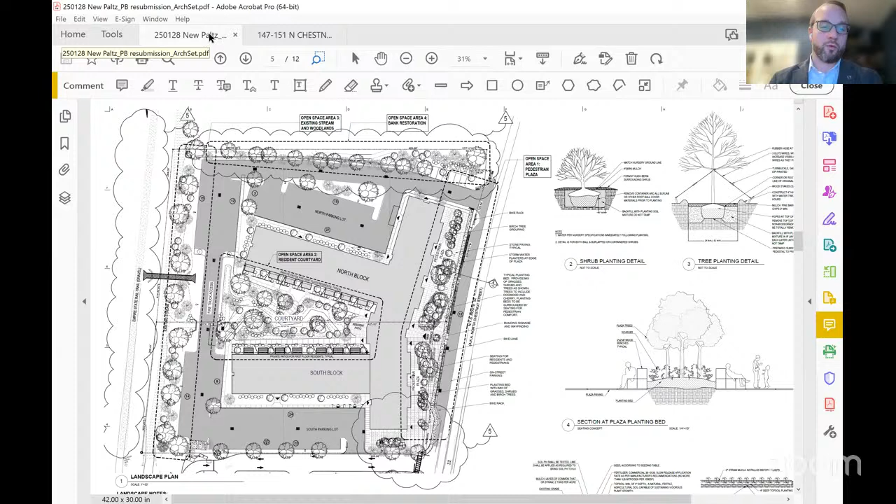If I may, the zoning board did weigh in on it during our initial meetings with them in July and leading through October of last year. They did make a request that we include it. Now, our variances have nothing to do with the trail, but they did make a request that we consider including this connection. So the zoning board at least made an affirmative ask that we include it. Similarly, even though it wasn't necessarily related to the relief itself, we made some other changes based on zoning board comments, for example, the proposal of the shared driveway with the development to the south. So we've been hearing comments from this board, your historic commission, design review board, and the zoning board, incorporating all those comments throughout this process.

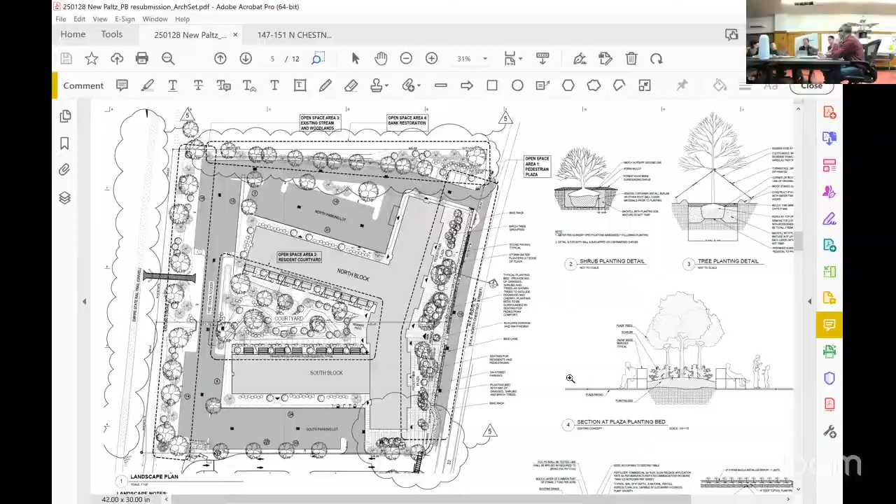Right. Well, I think moving on, we talked about traffic briefly. Mike, what was the latest update from our consultant?

So it's in your packet, the 2-page front and back from DTS is the last comment from them, and I believe you received that by email. Yes. And we have online tonight Brian Haggerty from DTS. At the last meeting, Mr. Chairman, which you weren't available for, the board had some specific questions and discussions about the impacts at the signalized intersections. That was sort of the gist of the discussion, so. I don't want to put words in people's mouths, but that's what I mostly remember. And I think you were gonna have some reaction to some of the questions.

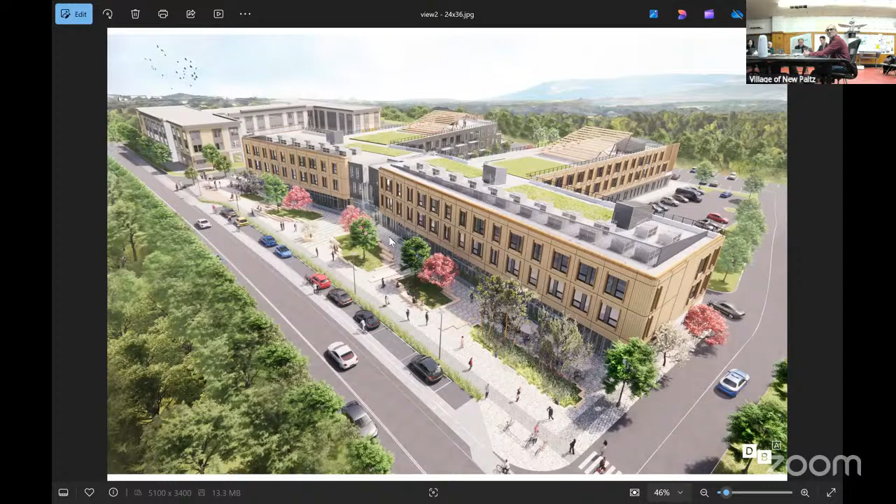Again, you've seen this rendering before, really not much change, just a slight elongation at the south side, and then the shared driveway running between the two buildings.

The request at the last meeting was for a view from the north looking south. So this is in fact a new rendering that you have not seen before, and this just highlights the pedestrian activity and the northern access road into the building. You can see at the end, the 145 package.

And then lastly, the rendering. Suspense is getting... I'll pull up the files. Second, it's here. Might have frozen. There we go.

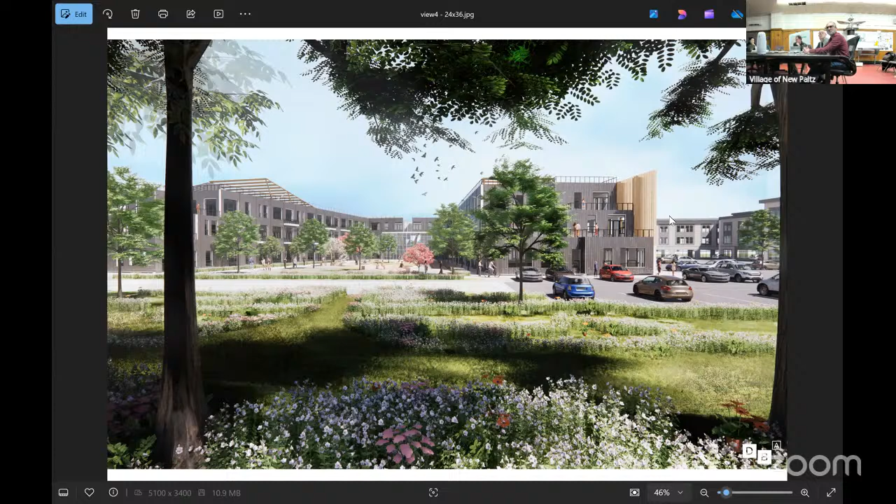And that is from the rail trail looking across the stream and to the rear yard. You'll notice the application of 145 also shown. And the residential courtyard, looking east into the shared amenity.

Okay, and is that actually the number of trees that will be between the rail trail and the project? It's very close. Yes, okay.

Well, thank you for bringing those, it's very helpful. I think going through these, the board's in agreement there's a moderate impact on question A.

For B, may result in the obstruction, elimination, or significant screening of one or more officially designated scenic views. I do not believe that is the case. I don't.

The proposed action will be visible from publicly accessible vantage points. Around, I think, yeah. There would be some moderate impact based on that.

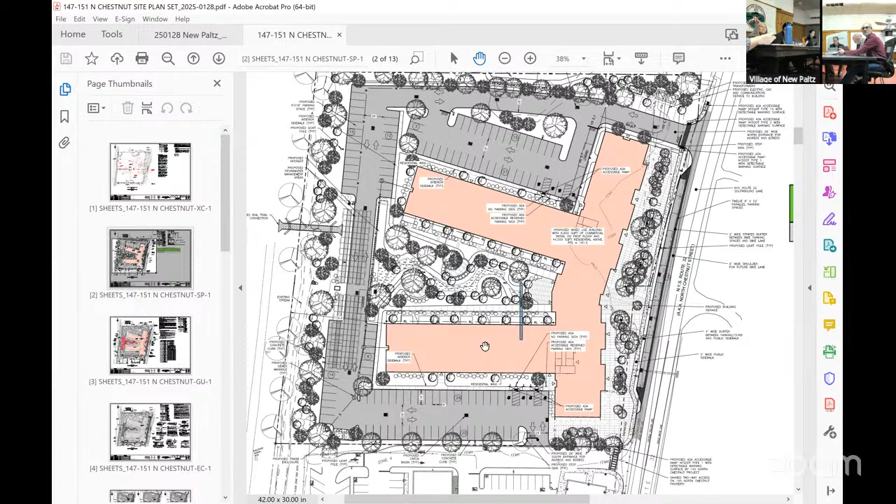Well, I think then that leads us into question D, since the rail trail is more recreational and tourism, I would say one and two are applicable. Routine travel will be from the roadway, I suppose.

Considering the existing condition is a vacant lot and a single family home, I would suggest that both would be moderate, but could be answerable in part 3. Yeah, okay.

Proposed action may cause a diminution of public enjoyment and appreciation of the designated aesthetic resource. I mean, I would lean towards small impact. Yeah, yeah, so.

I never know how that question still works out. Does that mean there's more or less of an impact if there are others? It's less impact. I don't think it has much of an impact, because basically they're doing exactly what we wanted them to do in this area.

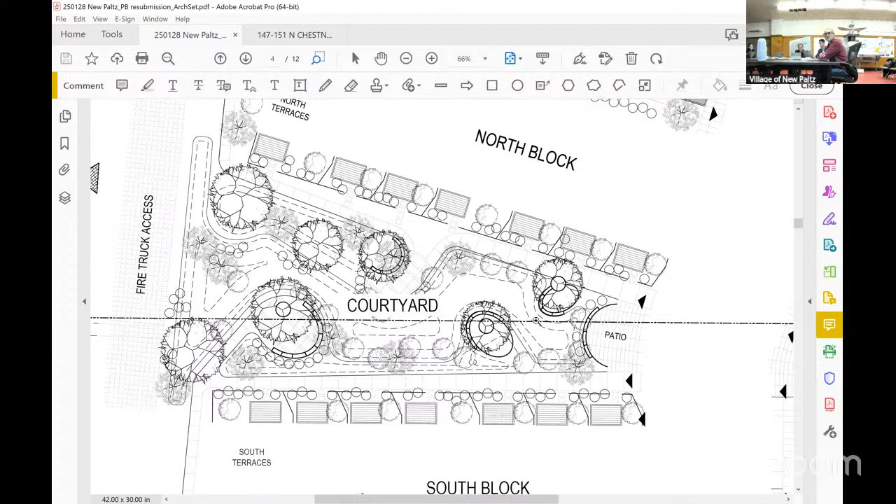It's a green courtyard, and it's also meant to give the residents a place to be outdoors. So between the trees, it's not paved. No, it's not. It looked like in the specific picture it looked like cement. Pervious pavers is the phrase I've heard. The paved areas are for safety, to bring people in and out of the building. So for instance, on the perimeter, you have paved walkways that allow the residents to move from one side to the other. But inside, this perimeter paving is all a catchment area for water. It's effectively, sometimes with a lot of rain, could become almost a wet location. So it's very pervious, very green, with the exception of the areas that the pavers show circulation.

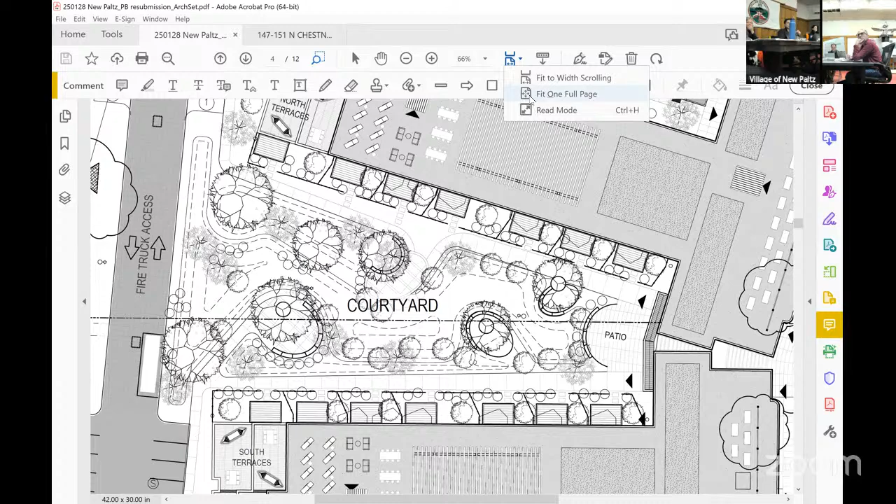There was something else I noticed on the rendering that I wanted to ask about. It seemed like the railing - when you're looking at the roof, there's that high railing. Was that something that the...

The design review board did comment on the railing, and they preferred it being smaller and set back. So at one point we did remove or reduce the height and move it back so that it's less impactful visually. That was really their main comment.

I mean, it's still pretty visible. Is that like a code regulation, that it has to be a certain height?

It does have to be a certain height, and in fact I feel like it does provide actually a cap, if you will, to the building. So aesthetically, I think it actually does complete the top edge of the building, like a traditional kind of cornice, but it's also providing a safety requirement to anybody who goes up on the roof for maintenance.

And what material is that made out of? It would be a steel rail, painted, most likely.

For the view from the rail trail, were we okay with that? Yeah, the only question I had was that it seems very open. I don't know, based on the site plan, it looks like there are actually more trees that will be between the rail trail and the parking lot, but I think you're right about that - so I would like to see a little more screening, but maybe this isn't representative of what's on the plan here.

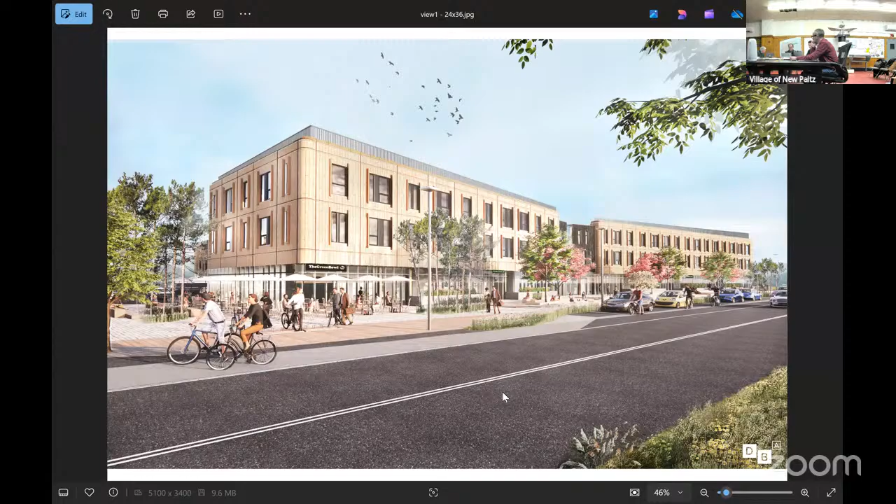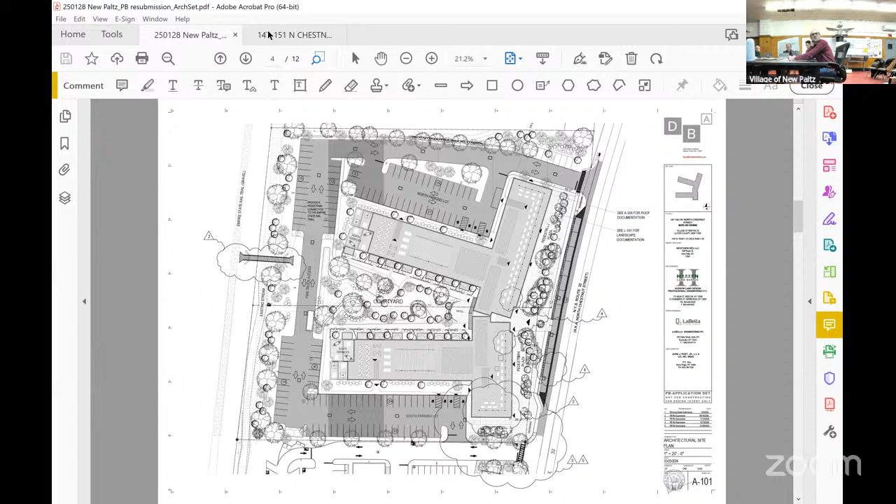Are you able to put up the image that showed, and maybe zoom in - there were a couple loading areas that looked to me like they're just sort of stopped in the flow of traffic, unloading at the curb. I'm not sure if that's loading areas for the businesses or what that is, but they sort of feel to me like they're in the traveled path. It's a personal preference of mine, but I'm not a big fan of that - I'd much prefer a separate loading area away from the travel lane.

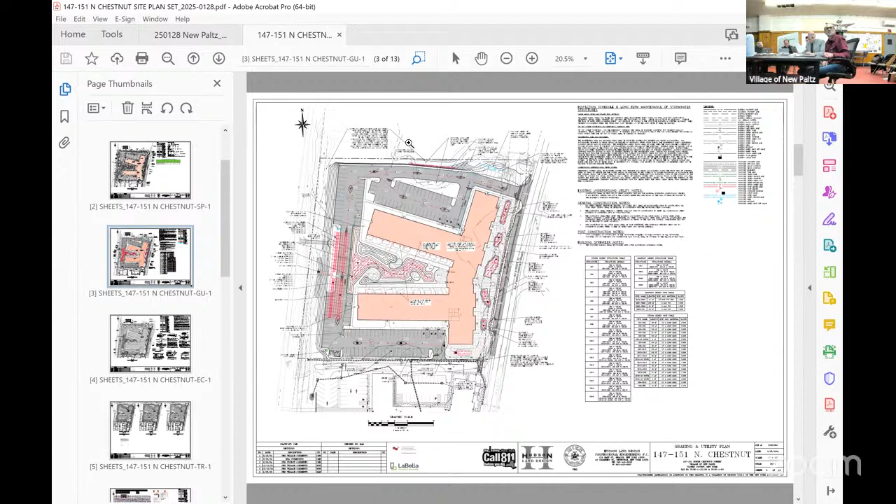Is the loading on your plans, Eric? The loading is on the - there's one in the back of the building, the northern part, and one on the back part that I saw for sure. So there were a couple - we have a vehicle turning plan, which I think they also highlighted. DTS also addressed this, but we can start with this, I believe. So these are the vehicle turning...

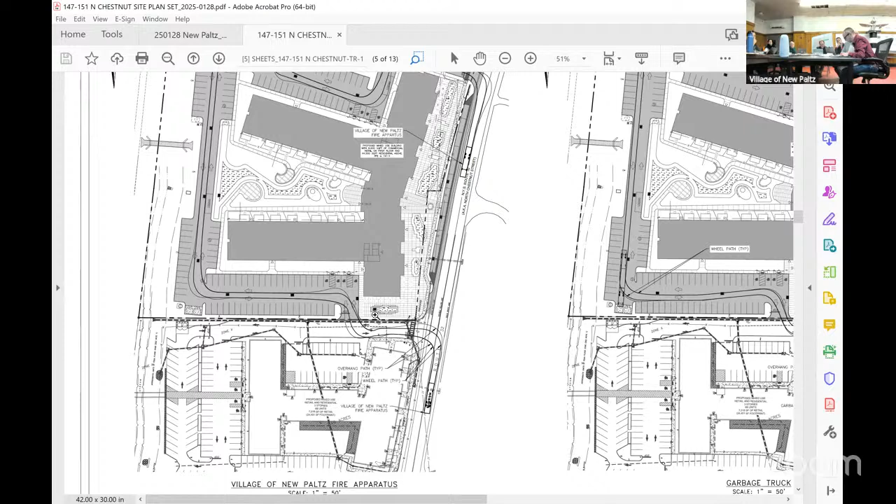Yep, and then if you zoom in - might have to get rid of that scroll bar on the left. There was a loading area for sure in the northern part. Yep, so I see, Eric - correct me if I'm wrong, it's the loading there, there we go. Yeah, and then right here, there's two.

Just for the board's convenience, DTS did note that the loading zones were identified on the site plan, and the turning templates demonstrate adequate maneuverability to these areas, as well as the dumpster area for a garbage truck.

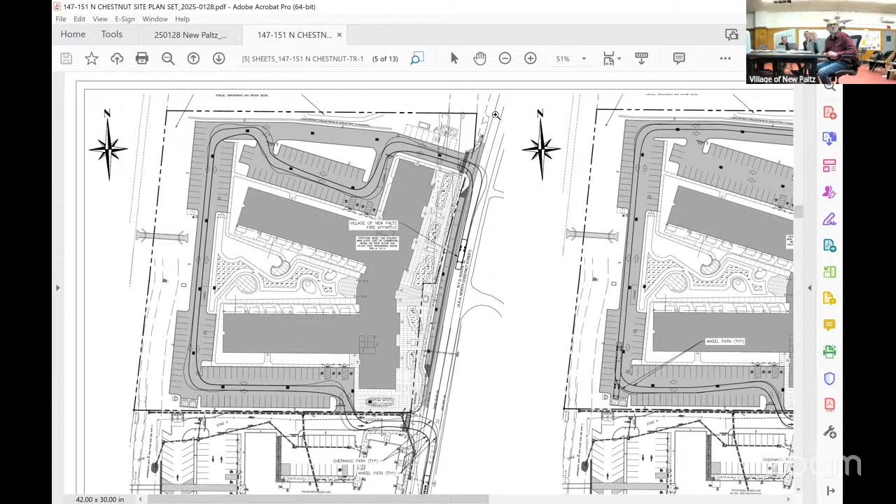I understand they don't block the turning radius, it's just, I wanted to bring it to the board. Maybe it's my personal preference, but making the loading area be in the path of travel. Can you zoom in on the upper part of that screen? Right there is the loading area.

And you'll see it's just part of the traveled way. That might also be because some different diagrams are used for the fire apparatus versus a garbage truck, so there might be different widths on that, but we'll clarify that as part of the information we provide. I just wanted to bring it to the board to have them look at that detail and see if you like or don't like it.

What you're seeing here is a fire truck's engineered turn. So this isn't the path that all traffic would take, it's the path a fire truck would take.

Sure, so that's a unique condition that wouldn't happen all the time. I mean, would two cars fit side by side next to that if there was a truck unloading? They could, but it would be tight.

I think in the past, as our site plan, we could stipulate certain loading times when peak activity is not happening. Or we could find a design solution.

As a plan then, if unloaded there, I see the sort of curb cut into the building. Would somebody be delivering on a dolly or a hand truck and coming into that? I'm just picturing with the large amount of commercial space that you potentially could be getting large deliveries.

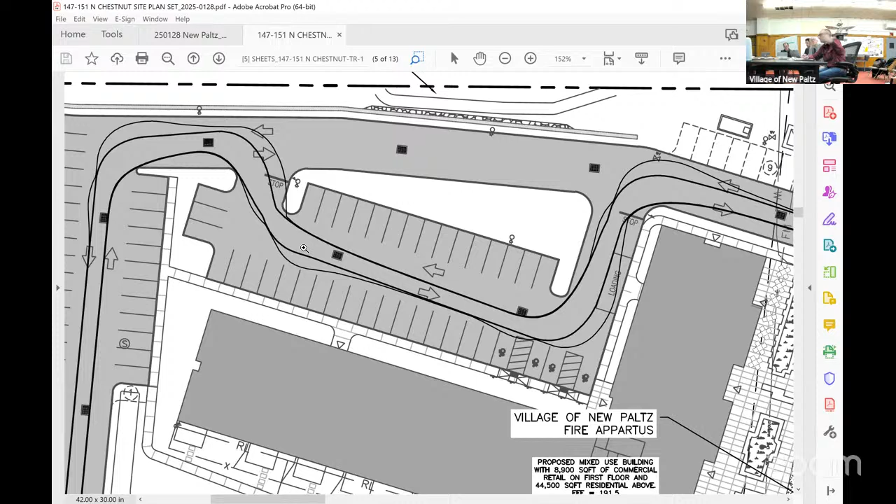There's also a second way out of that parking area, to the left, you can go out that way, so it's not blocked. And the other loading area was along the back side. I think I only saw two, I don't know if it was.

I mean, that one does appear to be in the traveled way based on the arrows. We definitely hear the comment; as part of the information provided, the board authorized the drafting of part 3, which will provide commentary on that, but I appreciate the comment.

Yeah, it's more about the site plan than the part. Yeah, I just wanted to mention it. People pull off, easy enough to do. It's not much of a problem, okay.

So for our next steps, would we consider setting a public hearing? Or do you think we're at that point? If you're ready, we can. We don't have to, we could open the public hearing and keep it open while we're going through one of the next steps too.

Yeah, if we want to do that. I do think we want to give adequate time for the public to hear about it and for things to come together. Would you want to consider setting the public hearing for the March meeting? Then there'll be one more meeting where they could potentially come back with answers for part 3. Set the public hearing for the March 4th meeting, which gives a little more time to get answers to part 3 and get that completed, just a suggestion.

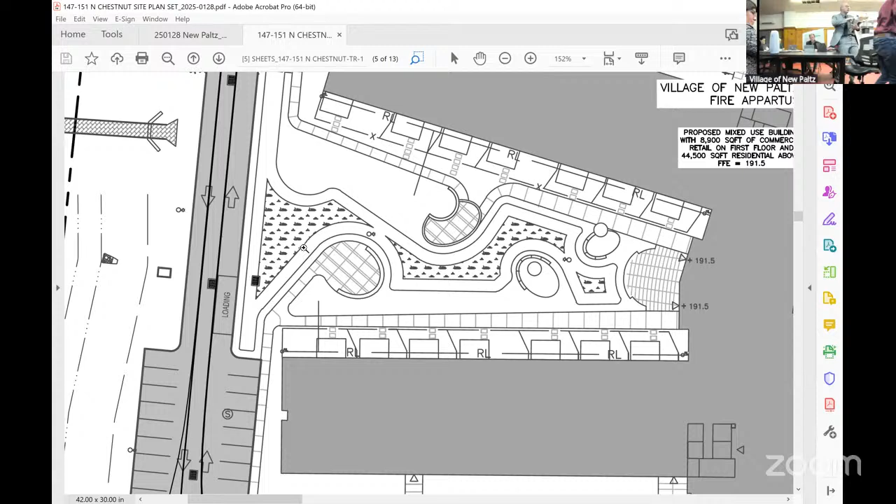There was an update today, very minor, to the proposed site plan. We'll have the latest. The changes were minor: the house shifted a few feet, and the pool shifted a few feet.

This is a project in the upper corner of the Green Acres neighborhood on Cooper Street. It's a double lot, currently flag lots, and the owners want to combine them into one lot and build a house. So we're before you for subdivision or re-subdivision review, as well as site plan review, and we're also seeking a 5-foot building height variance from the ZBA.